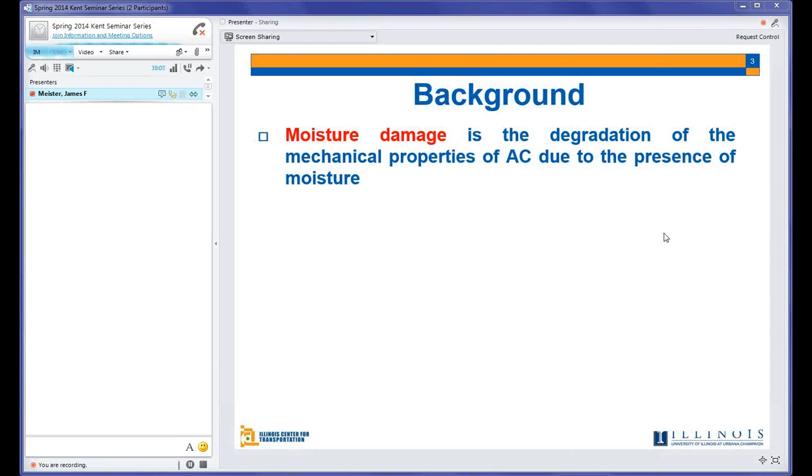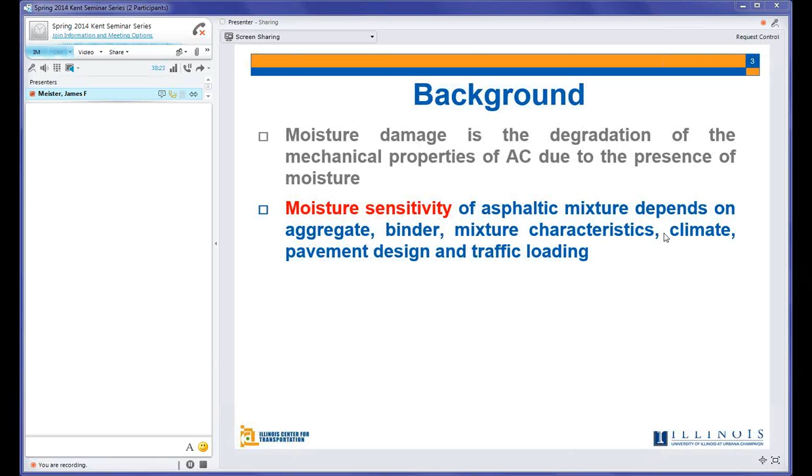Moisture damage, briefly, is defined as a degradation of asphalt concrete mechanical properties due to the existence of moisture. The susceptibility or sensitivity of asphalt mixture to moisture depends on several factors - most importantly, the aggregate and binder used in the asphalt mix, the mixture characteristics between those two components, the climatic conditions, the pavement design, and the traffic loading.

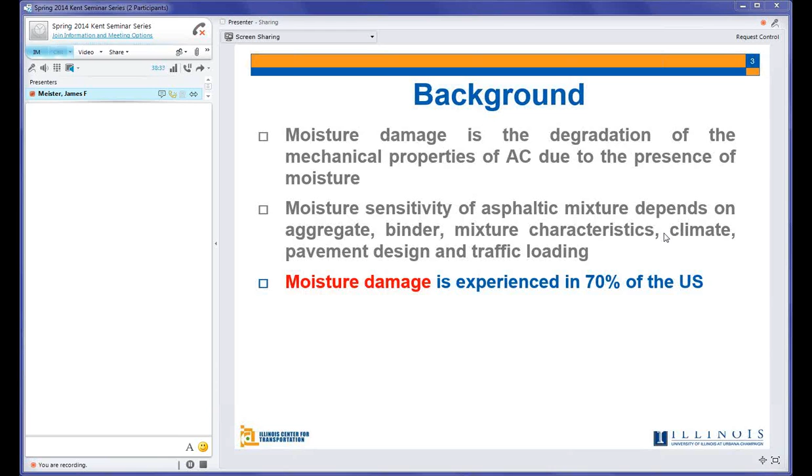It is good to know that 70% of our roads here are suffering from this phenomenon, moisture damage. When moisture exists in asphalt concrete, it deteriorates the asphalt through two main mechanisms: the loss of adhesion, where the bond between the aggregate and the asphalt binder weakens, and loss of cohesion, where the bond within the binder itself starts to weaken. Now, the problem statement - why did we do this study?

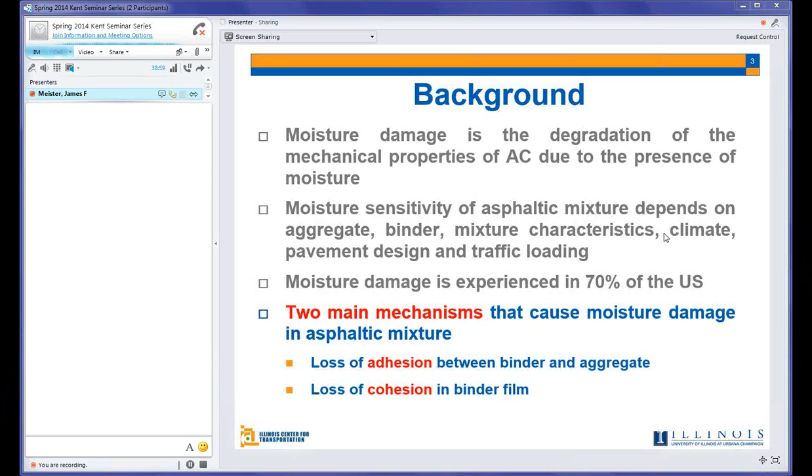For your knowledge, transportation agencies, when they face moisture damage or know they have a moisture susceptible mix, tend to follow one or more of the following approaches. Either they use an additive or modifier added to the asphalt mixture in order to enhance the bonding between the asphalt binder and the aggregate, making it more moisture resistant.

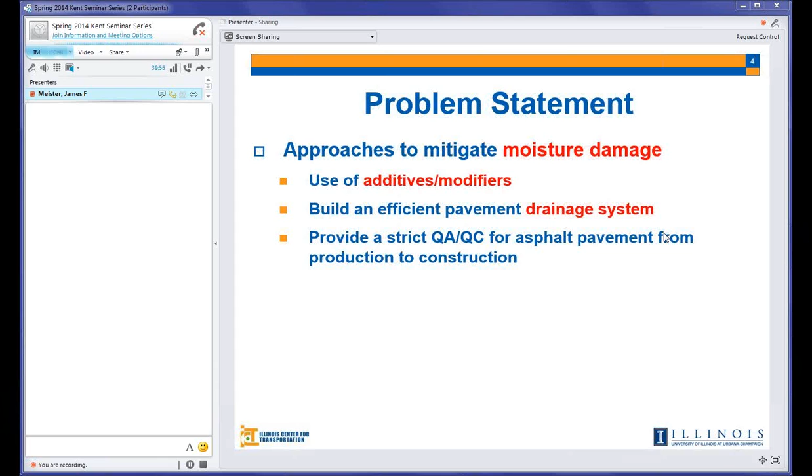They make sure that they build an efficient drainage system. It's inevitable that we will, at the end, have moisture in the pavement, but the key here is that we need to get rid of that moisture as fast as possible. And also, it's good to have strict QA/QC for the asphalt pavement, starting from the production at the asphalt plant toward the end, which is the construction.

Another challenge for moisture damage is how we are going to evaluate the moisture susceptibility of asphalt mixtures in the lab. There are a lot of laboratory tests which can indicate whether a mixture is moisture susceptible or not. But most of the time, those mixture level tests share some drawbacks. First, they are empirical tests, unfortunately not built on fundamental properties of the asphalt mixture, so the results will keep changing. There are also limitations on the simulation of the pavement climatic conditions that the pavement suffers in the field, and that's a major drawback.

One of the major drawbacks is also the lack of correlation between field and lab results. So maybe in the field you will find the mix is moisture susceptible, but when you test it in the lab it's not, and vice versa. Because of that, at the time of this study, we were starting to experiment with the push-pull test. It was a new test at that time in our lab, and we wanted to see if we could capture or evaluate the moisture susceptibility of asphalt mixes using that test.

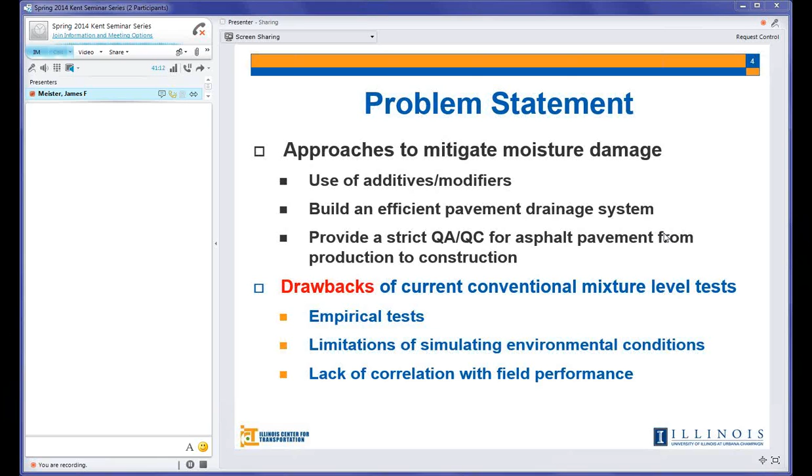This takes us to the objective of this study, which is briefly to evaluate the effectiveness of liquid anti-strip agent and hydrated lime on reducing asphalt mixture moisture susceptibility using the push-pull test. We have two major mixture tests used in this study, the push-pull test and the Lottman test, and we will talk about them in detail in the coming slides.

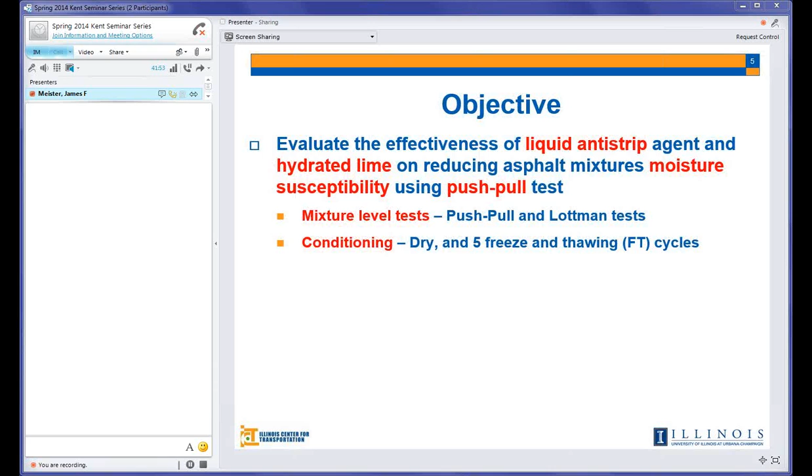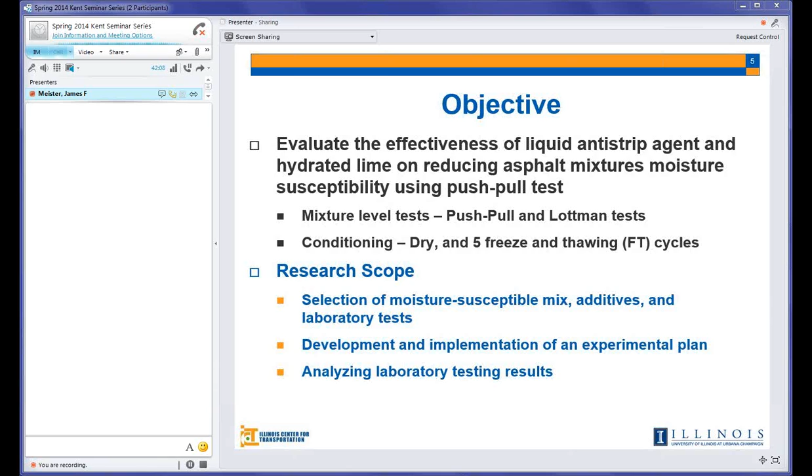Conditioning-wise, we conditioned the samples under the dry conditioning state and also a set with 5 freezing-thawing cycles. So the scope of the work will first be selection of a moisture susceptible mix, and the additives, which is lime and liquid anti-strip, as mentioned in the objective. We were going to develop an experimental plan which we would then implement, and the results would be gathered and analyzed toward the end.

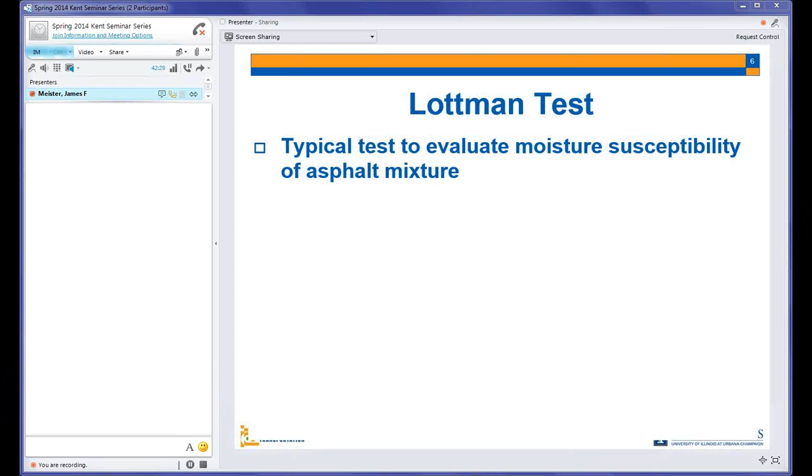So what is the Lottman test? Lotman test is the typical test in the US used to evaluate moisture susceptibility. Most transportation engineers know that this test is used by different agencies to evaluate the moisture susceptibility of asphalt mixtures. The sample dimensions are 95 millimeters in height, 150 millimeters in diameter.

For each asphalt mixture, we prepare 2 sets. One is the unconditioned set, which we don't condition except put in a 25 degree water bath for 2 hours and then test. The other set is the conditioned set.

It depends on which state you are working in. In Illinois, we have our Illinois conditioning procedure. You can also have 1 freezing-thawing cycle, 2, 3, as much as you desire. We take 2 parameters from this test: the indirect tensile strength, IDT—we call it indirect because we apply a compressive load, but really we are focusing on the tension test results. The second parameter is the tensile stress ratio, which is the IDT of the conditioned set relative to the IDT of the unconditioned set.

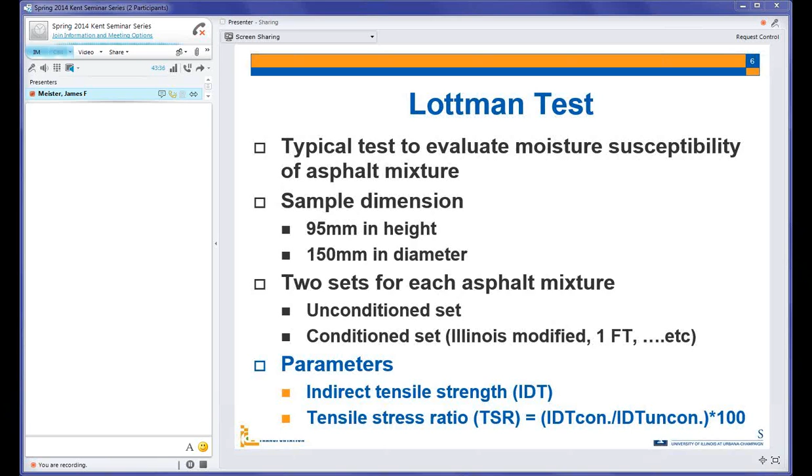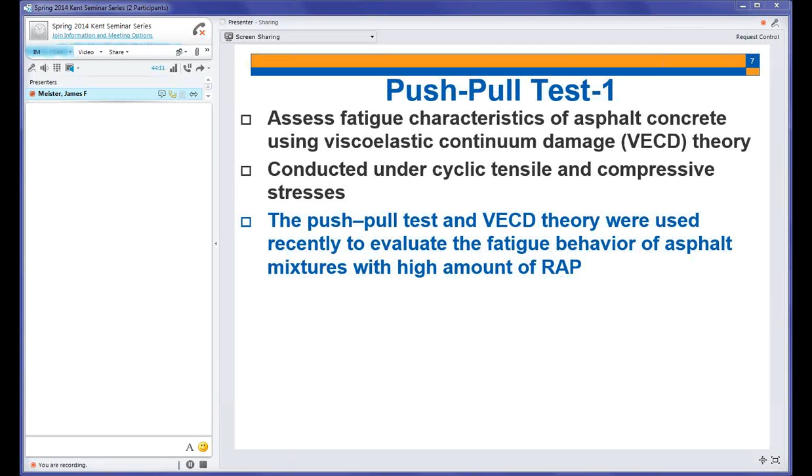The second test is the push-pull test, a relatively new test in our lab. It uses the viscoelastic continuum damage theory to assess the fatigue properties of the asphalt mixture. It applies cyclic loading, tension and compression, until failure. It was recently used before my study to evaluate fatigue properties and behavior for mixes with RAP. Dr. Kazi, a student here, used this for mixes with 50%, 40%, and 30% RAP.

In this study, we conducted this test under strain control mode. We cannot conduct it under stress control here because we don't have the equipment ready for that. It was done at a frequency of 10 hertz. We used 3 strain levels—200, 250, and 150 microstrains—at 2 temperatures, 20 and 10 Celsius.

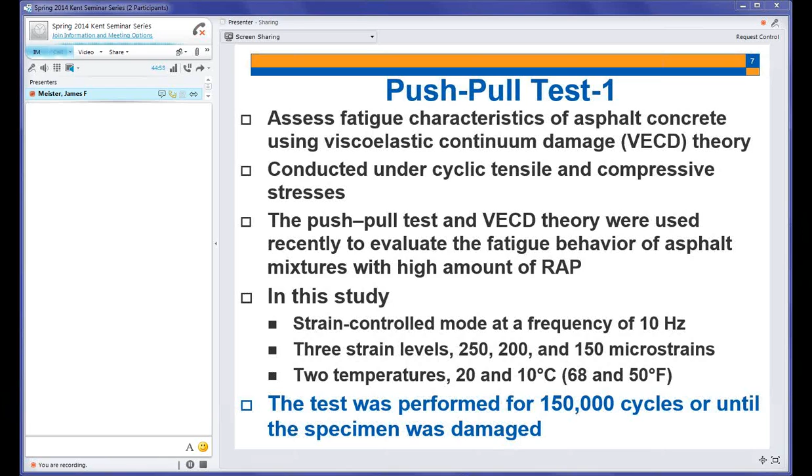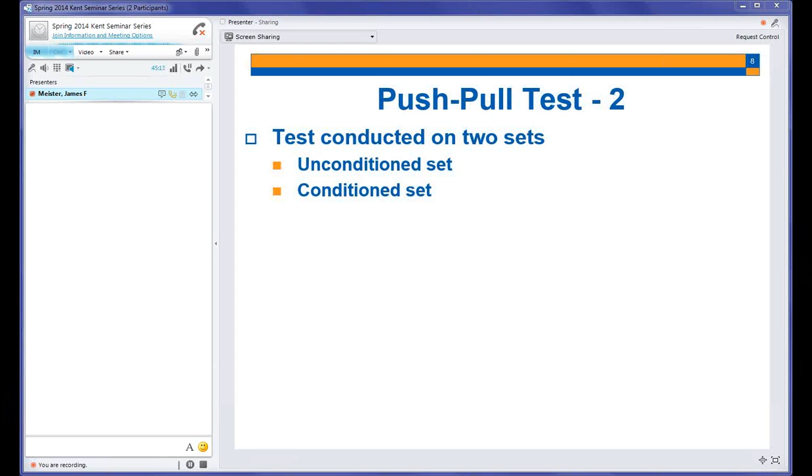The test was performed until 150,000 cycles or until the samples failed, whichever came earlier. It was also tested on 2 sets, unconditioned and conditioned. Unconditioned means we don't put it in water at all—we prepare the sample and test it immediately. The conditioned set again could follow the Illinois modified procedure with 2 or 3 cycles, but as mentioned in the objective, it was only 5 freezing-thawing cycles in this study.

Sample dimensions were similar to those used to measure the complex modulus of asphalt concrete: 150 millimeters in height, 100 millimeters in diameter, and we will see why it's similar to the complex modulus samples. The parameters are the pseudo stiffness, C, versus the damage parameter S. Pseudo stiffness is basically the amount of drop in complex modulus at each loading cycle compared to the initial complex modulus we started the test with. That's why we use the complex modulus—we need its initial value, so we run the complex modulus test before testing the sample for the push-pull test.

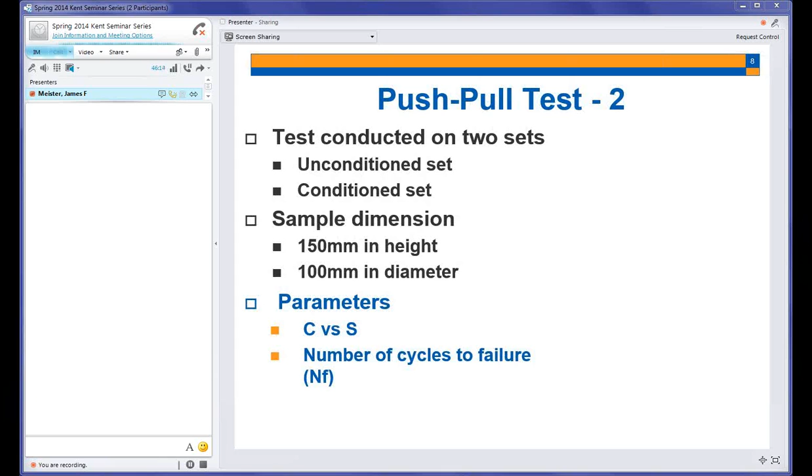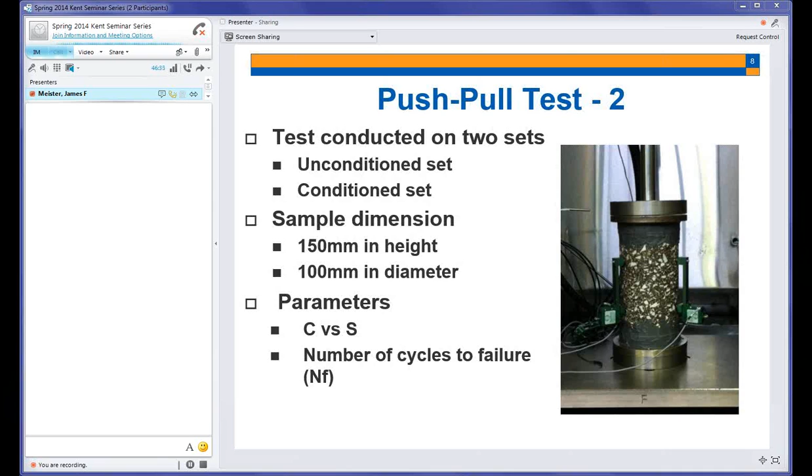The second important parameter is the number of cycles to failure. This is a fatigue test, so we need to know the number of cycles to failure from any fatigue test. This is the setup of the push-pull test—this is the complex modulus sample, similar dimensions. We glue it to a bottom and top cap, then screw those caps to the fixture, and apply tension and compression load until failure. Those are the extensometers that measure the deformations.

Materials used in this study—we made sure to use a moisture susceptible mix, in this case an N90 19 millimeter nominal maximum aggregate size binder mix. It was moisture susceptible based on IDOT specification, meaning the TSR, or tensile stress ratio, of this mix was less than 85%. In Illinois, if it is less than 85%, it is a moisture susceptible mix.

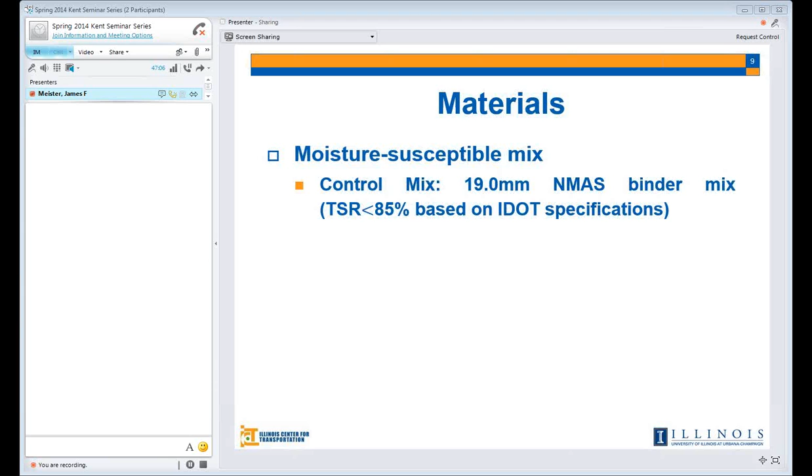The samples were conditioned with only one freezing-thawing cycle. This mix is from District 5. The additive used was liquid anti-strip, brand Pavegrip 550, also used in District 5—when they need to add liquid anti-strip, they use this one. We used 0.75% by weight of the binder, so liquid anti-strip was added to the asphalt binder. For the lime, we added 1% lime to the aggregate, by dry weight of the aggregate.

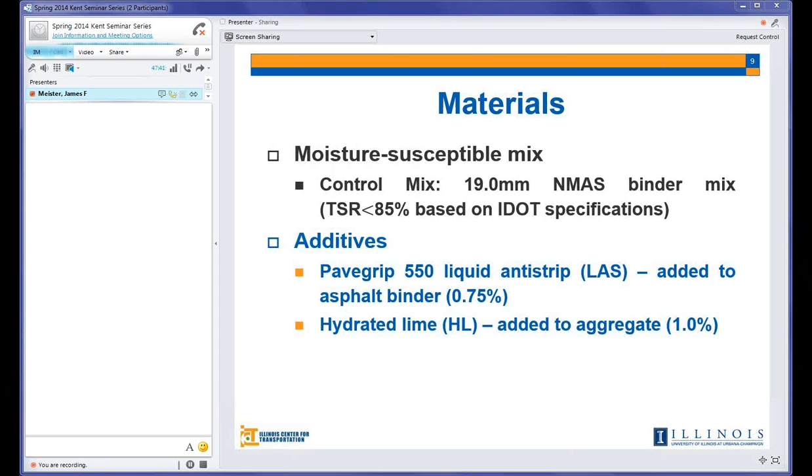This is the experimental plan. I won't go into details, but as mentioned, there are 2 tests. For each test, we have 3 mixes: the control mix, which is moisture susceptible, the same mix with liquid anti-strip, and the same mix with lime. All have the same aggregate gradation—everything is the same. The only difference is the addition of liquid anti-strip and lime. For each mix, for each test, we tested 2 sets: unconditioned and conditioned.

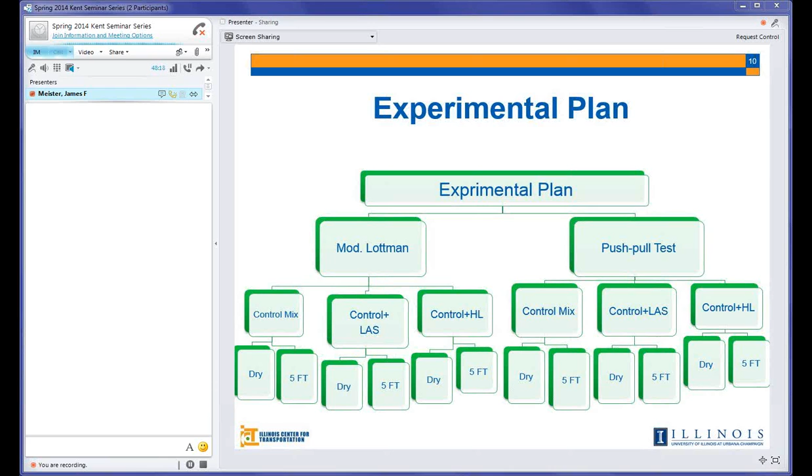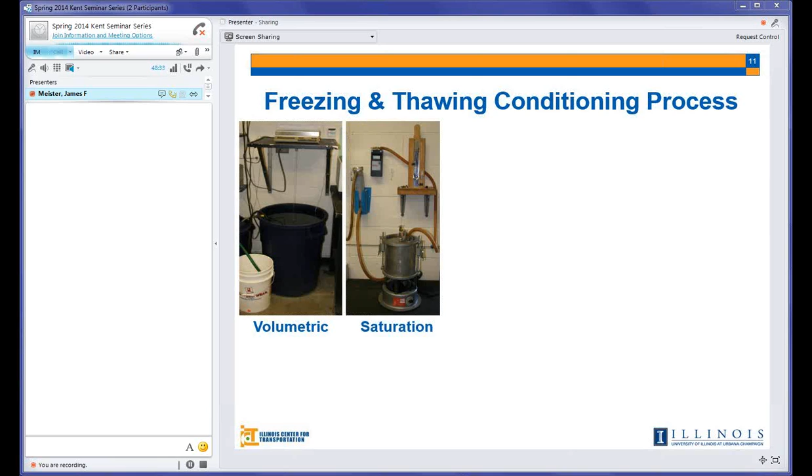The condition was every time 5 freezing thawing cycles. What does that mean in more detail? When we prepare the samples, we measure the volumetrics of each sample, meaning we measure the air voids, the amount of air voids in each sample. We saturate the sample by using a vacuum.

Saturating means here filling 70 to 80% of the air voids of that sample with water. Then of course we wrap the sample with saran wrap, then in a plastic bag. We add 10 milliliters of water. After that, we place it in a freezer at -18°C for at least 16 hours. After this is done, we place the samples in a 60 degree water bath for 24 hours.

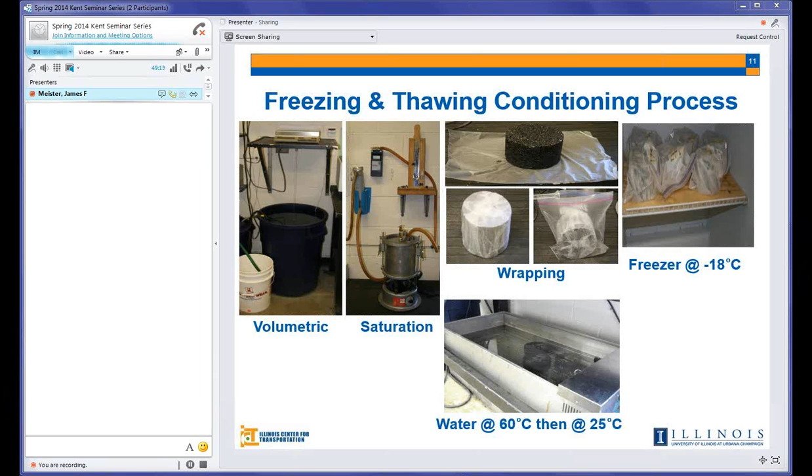With that, we finish 1 freezing thawing cycle. Since we are doing 5 freezing thawing cycles in this study, we repeat this step again another 4 times. With that, we have 5 freezing thawing cycles. The last thawing cycle, we take the sample from a 60 degree water bath, put it for 2 hours in a 25 degree water bath, and then the samples are ready for testing. This is an IDT sample. The same thing was done for the push-pull sample, but of course the sample dimensions are different.

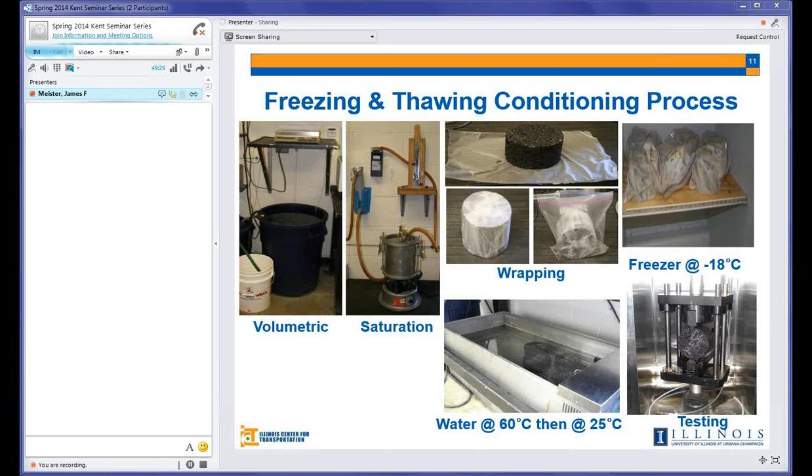Lime addition - there are several addition techniques for lime. In Illinois here we have 3 techniques: slurry, wet, and dry.

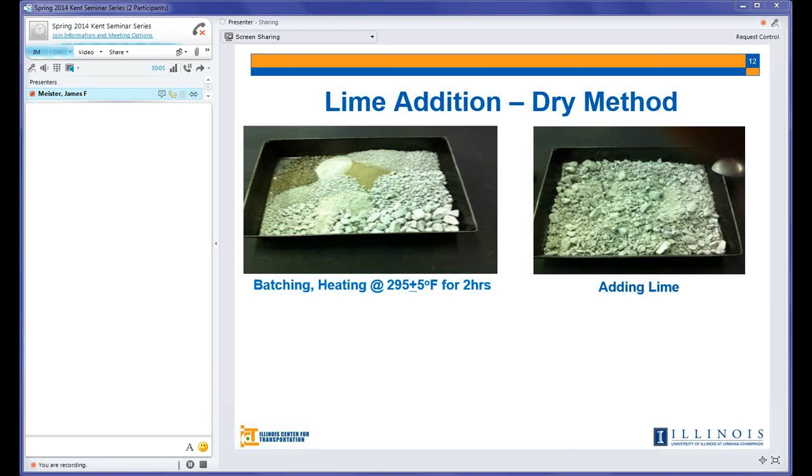The method that we used in this study was the dry technique, which is basically we batch normally the aggregate, but without the mineral filler, of course, and dry it in the oven for at least 2 hours to make sure that all the moisture is evaporated and the temperature is 295 Fahrenheit. Then we take it out, add the 1% lime, and also after that we add the mineral filler, put it back in the oven just to make sure that the batch goes back to the mixing temperature, and then we finish. We go ahead and continue with the normal mixing and compaction procedure.

Now moving toward the end, to almost the last part of this presentation, which is the results that we got from the conducted tests, starting with the Lottman test. The Lottman test, as described earlier, uses IDOT specifications for this study. Although we are using 5 freezing thawing cycles, and in Illinois the Department of Transportation uses 1 thawing cycle, we are going to stick with these specifications.

The tensile strength threshold for unmodified mixes, which is our mixes because we use PG64-22 unmodified binder, is 60 psi. Lower than 60 psi means that the mix is weak. The TSR threshold, the tensile strength ratio, is 85%. So if your mix has a TSR less than 85%, this means that it is a moisture susceptible mix.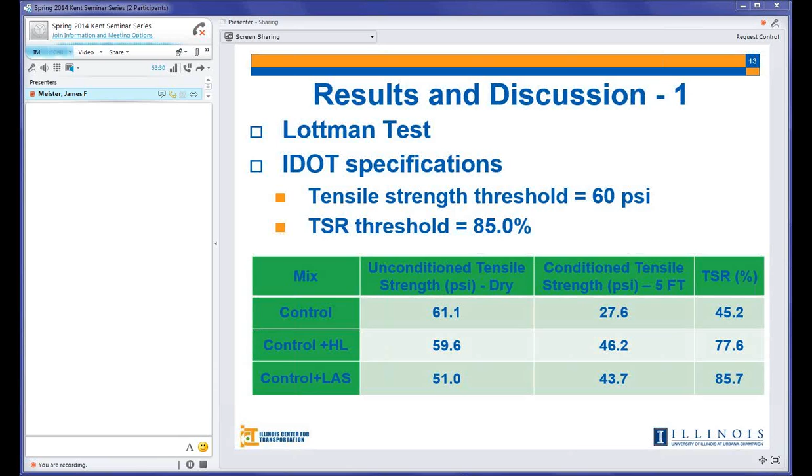This is the first test. The second test, which is the complex modulus. As we said, complex modulus is a prerequisite for the push-pull. You cannot test the samples for the push-pull except after you test them for the complex modulus. You need to know that value to input it as an initial value.

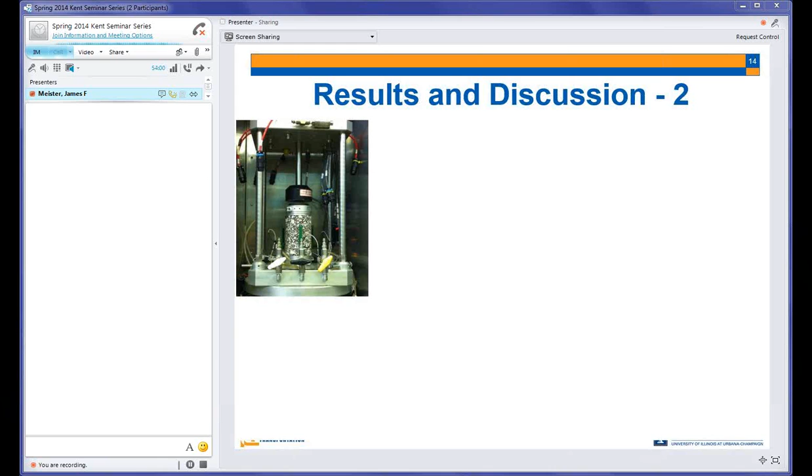So this is the fixture for the dynamic modulus. I'm sure most of you are aware of it. And these are the master curves, and we have 6 master curves, 3 for the unconditioned and 3 for the conditioned, because we have three mixes.

And what did they do? They measured the complex modulus at 21C, and at each frequency at 21C, they found what we call the E-star ratio, in which they divided the E-star, or complex modulus, of the conditioned relative to the unconditioned, which is similar to the idea of the TSR.

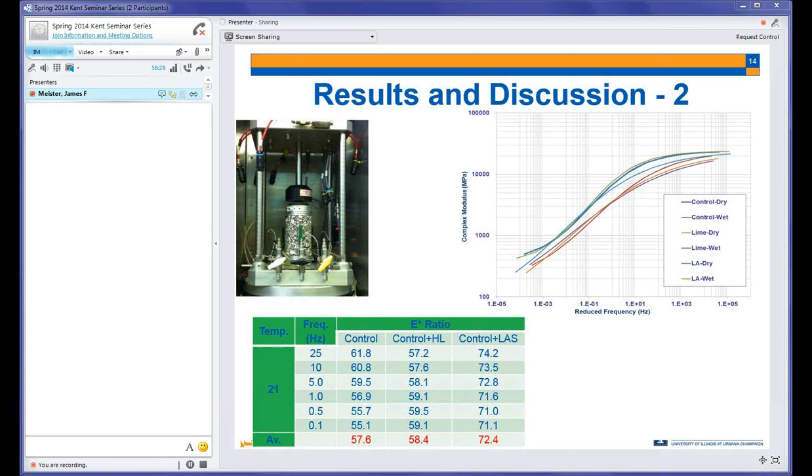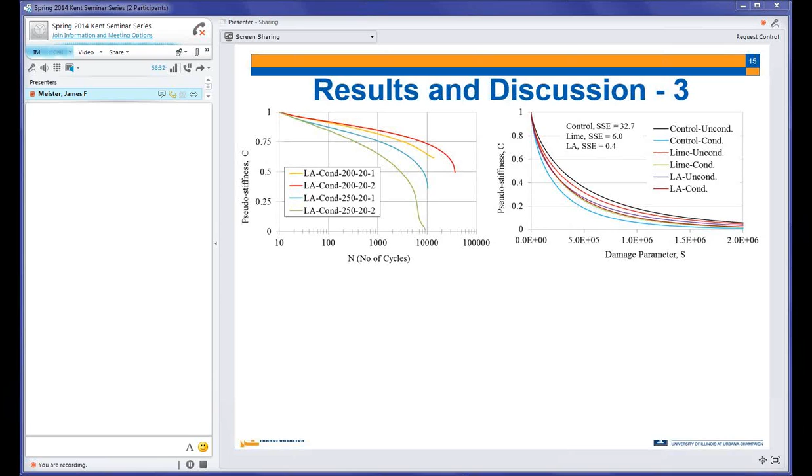So the question is, how are we going to report this? Which damage parameter should we stop at and say, okay, at this damage parameter, this mix is better than this mix? Since we only have 3 mixes, we cannot build a solid conclusion. So we thought, why don't we take all the curves? We compare the curve of each mix between its unconditioned and conditioned, and find the sum of square error between those 2 curves for each mix, and see what values we're getting.

Slightly higher for the lime, 6, but a huge drop for the control. As we can see, the control is the black curve, the highest curve, and this is the unconditioned. The conditioned is the blue curve, so a big, huge drop after we condition the control mix. And if you still remember the TSR values, this is the same ranking we got from that test.

Now we know that this is a fatigue test. And we know for fatigue tests, when you have a softer mix, it requires a higher number of cycles to failure. This is basically a fatigue rule, for example. And as we saw from the complex modulus results, when we condition the samples, the mixes all get softer and have lower complex modulus compared to their original unconditioned mixes.

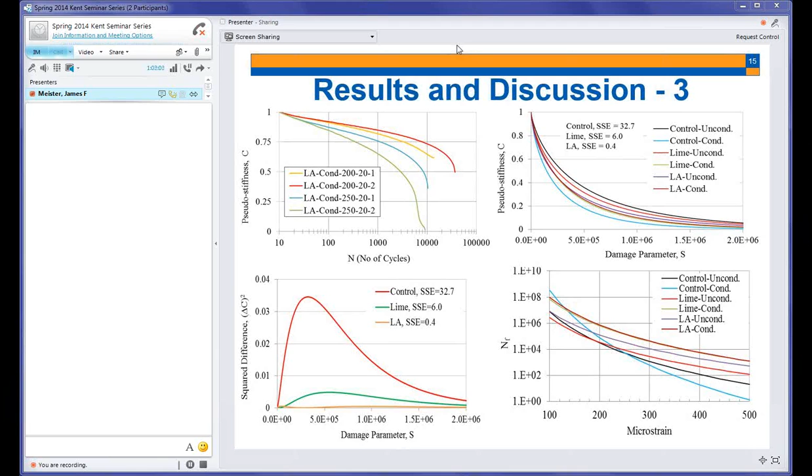So what we found so far is that the push-pull test gives us the same ranking as the Lottman test. And if you ask anybody who ran both tests for moisture sensitivity, he will tell you immediately he would go with the Lottman test because it's relatively easier, less time consuming, and less effort. So the question is, why should we use the push-pull test at the end?

As authors, we discussed this a lot. The thing is, we don't only look at whether a test in the lab is easier or not. There are a lot of benefits we can get sometimes from tests that use more time, properties that can give us better prediction about performance and behavior in the field. One of them is that the IDT or Lottman test is a strength test that tests the mixture in very extreme conditions, meaning you will never see in the field a pavement loaded until it fails.

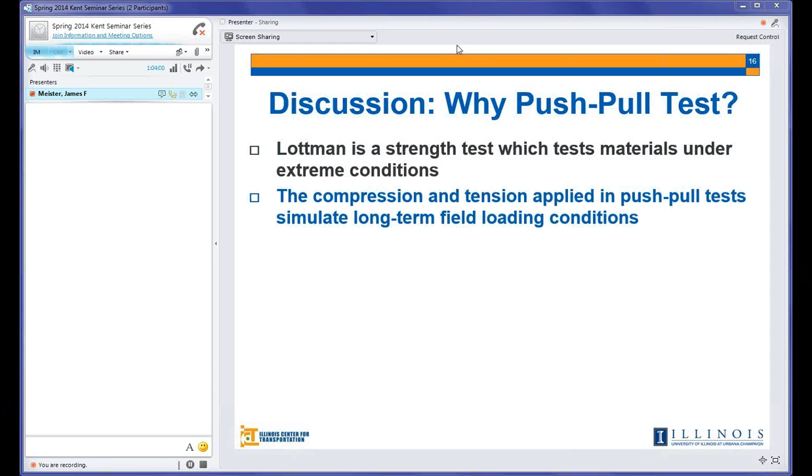You will always see cyclic loading coming on the pavement, track after track, stress after stress. This is better simulated in the push-pull test than in the Lottman test, because we apply cyclic loading, tension and compression, until failure. One more thing: the Lottman test gives you a snapshot of the material. You only get one value from the Lottman test, that's it, its tensile strength.

You will get the TSR too, but it's also a reflection of the tensile strength, so you only get one thing out of that test. But from the push-pull test, when you run many samples at different temperatures and different microstrains, you can have a huge map about the performance and the fatigue behavior of that mix at any condition.

You can predict the performance at any behavior, at any microstrain, at any temperature, and that's something you will never get from the Lottman test. One thing I kept saying more than once in this presentation is that you get tension failure from the Lottman test, but by applying a compressive load. So why don't we go to a test that applies a direct tension test, which is more influential to the asphalt mixture being tested for moisture sensitivity.

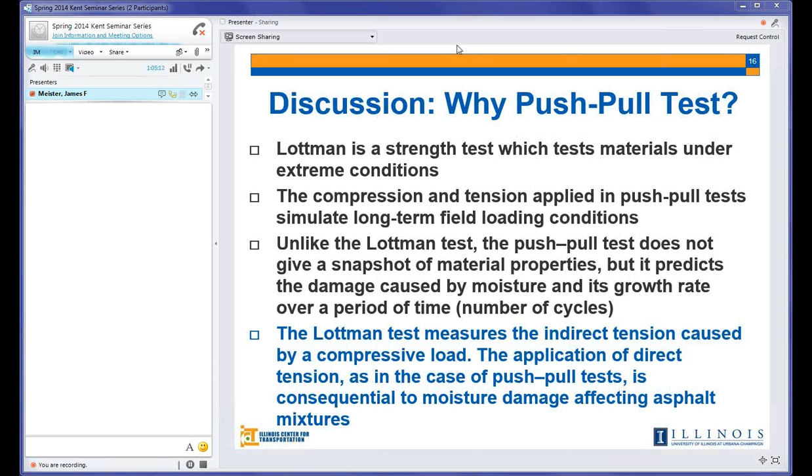So the conclusion: complex modulus evaluates asphalt mixtures under compressive loading, while the push-pull does that under cyclic tension and compression forces. The push-pull test appears to simulate long-term field loading conditions, and it can be used, as shown, at least for our three mixes, to assess moisture susceptibility. The tensile-based test - because we have tension failure in both tests, the Lottman and the push-pull - they result in the same ranking for the three mixes.

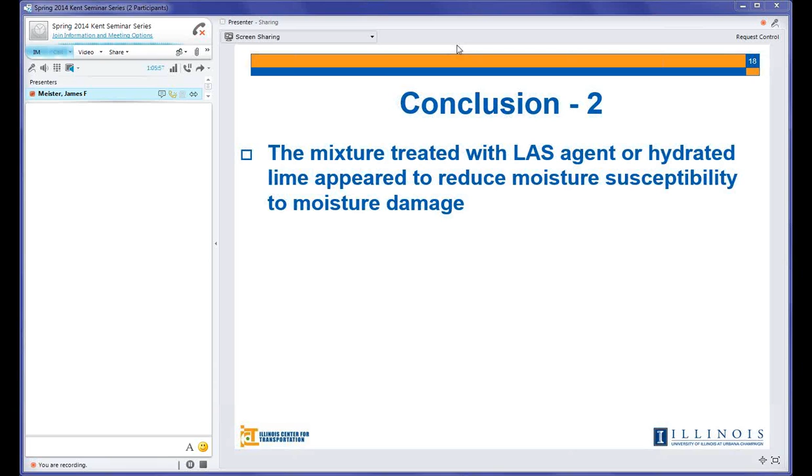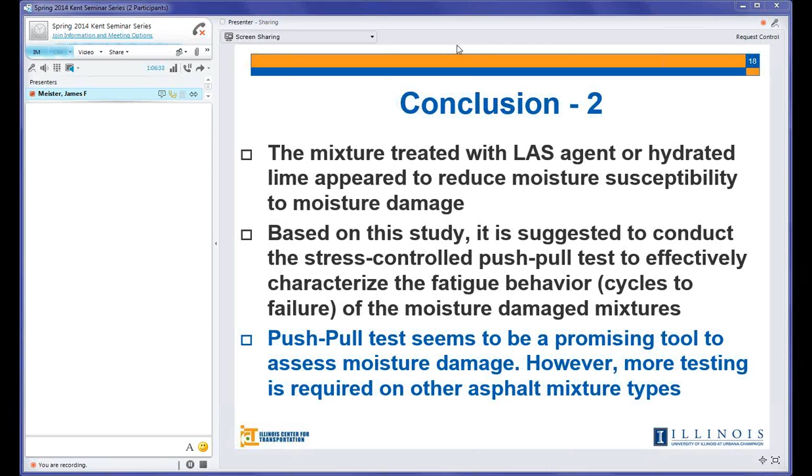We saw that liquid antistrip and lime in both tests have resulted in reducing the moisture susceptibility of the asphalt mixes. Based on the results of this study, we found it's better to run the push-pull test if we want to see better prediction of fatigue in the field under stress controlled rather than strain controlled. Finally, it seems to be a promising tool, the push-pull, but of course we need to run this test for more than three mixes. We need to run it for different types of mixes - we have SMAs, warm mix asphalts, fine mixes, mixes with RAP, mixes with RAS. We need to run this test on all these types in order to come up with a very good and solid conclusion.